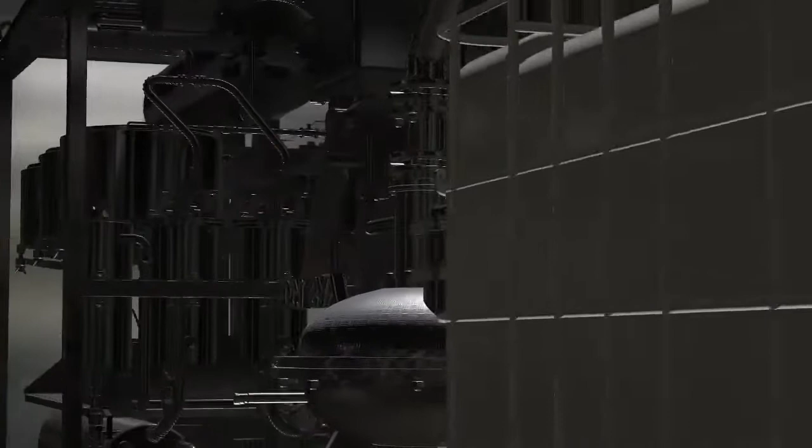In this video, we will show you how to reduce the sulfur content in diesel fuel using purification reagents.

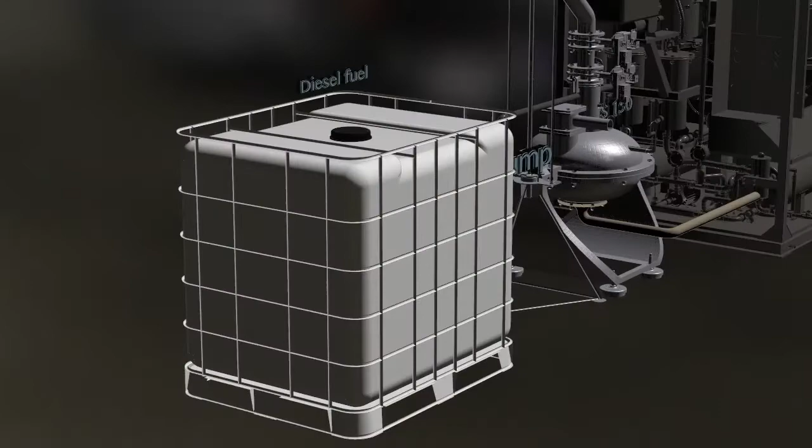Flowchart of cleaning diesel fuel of sulfur consists of a tank with a volume of 1 cubic meter, a pump for pumping fuel from a tank into AVS 150 vortex-layer device with a measuring pump for supplying a reagent, a dispenser supplying the ferromagnetic particles into the working chamber of AVS 150 vortex-layer device, and UVR vacuum regeneration unit.

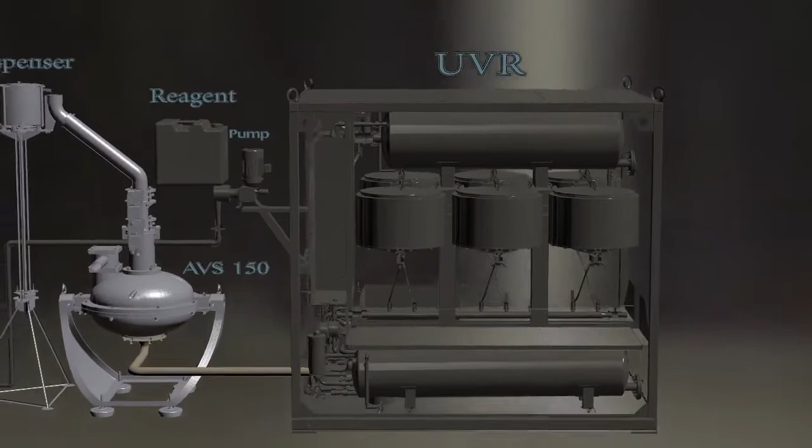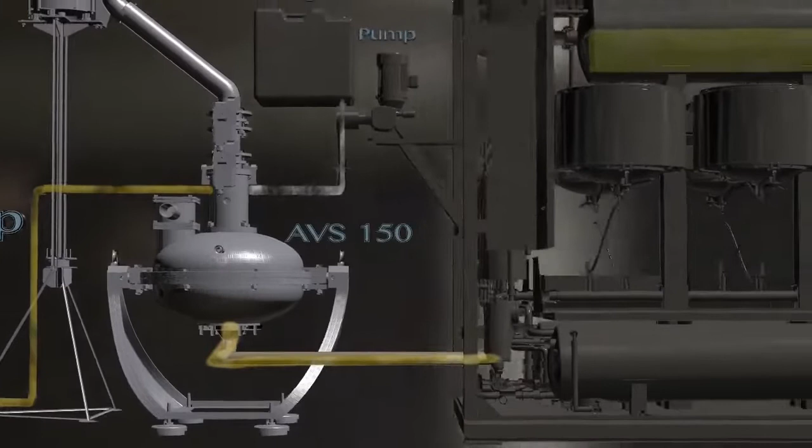We pour diesel fuel into the tank with a volume of 1 cubic meter. It is pumped into the working chamber of AVS 150. The reagent is fed at the same time from a 30-liter barrel. The treatment in AVS 150 lasts fractions of a second.

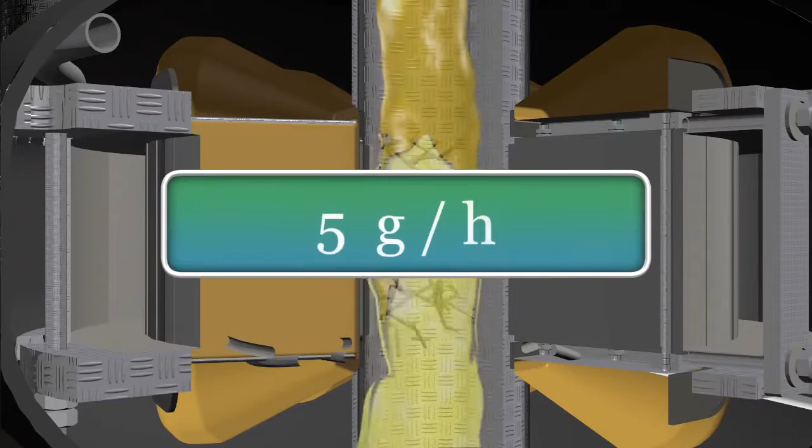Steel ferromagnetic particles help to mix reagent with diesel fuel. The ferromagnetic particles wear off during operation at 5 grams per hour, or 0.01 gram per liter of diesel fuel. Ferromagnetic particles are reloaded automatically by a dispenser. The productivity of the unit is 0.5 cubic meters per hour.

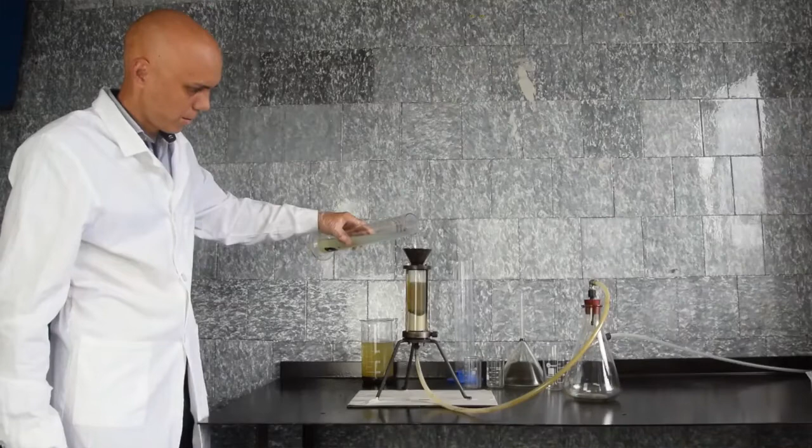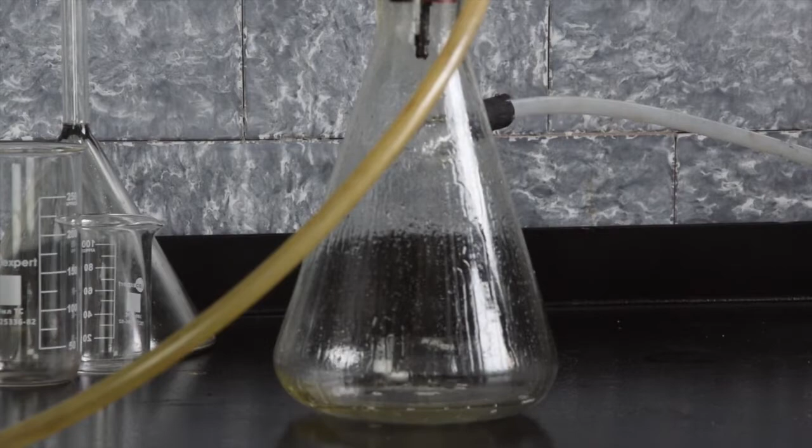The effectiveness of reagent cleaning depends on the intensity of mixing the components into the emulsion. Then the emulsion needs time to separate with precipitation of reagents. We use the vortex-layer device AVS 150 to amplify this process. It provides intensive mixing of diesel fuel with reagent despite low temperatures and low concentration of solutions.

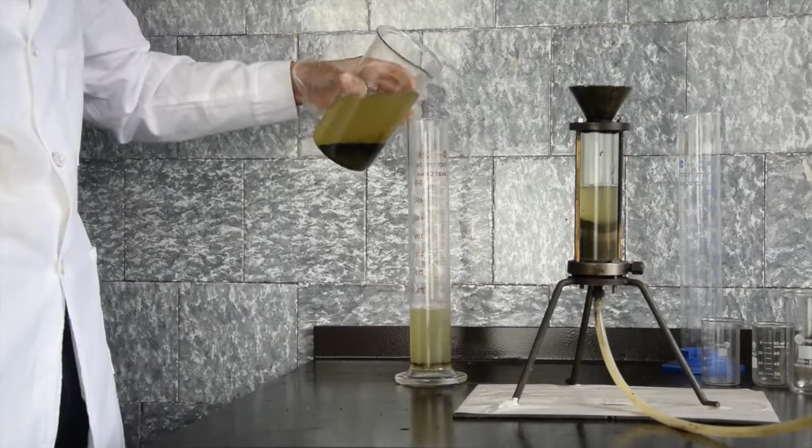First, the fuel is preheated to 95 degrees, so it is not necessary to heat it during the process, as the temperature in the unit's working chamber is 100 to 150 degrees. Then the precipitation and filtration is done in the UVR fuel oil cleaning system.

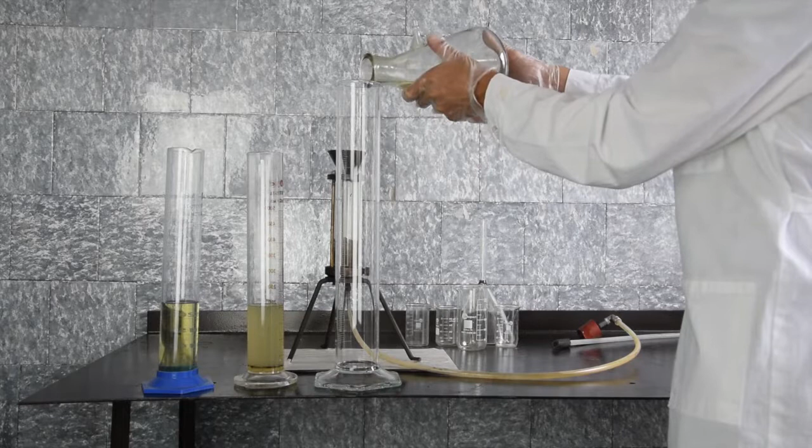Technical characteristics of diesel fuel according to the quality passport: sulfur content 337 mg per kilogram, flash point at 75 degrees. Fuel properties: no more than 25.3% in volume evaporates at 250 degrees, not more than 93.3% in volume evaporates at 350 degrees, and 95% in volume distills at 354.2 degrees.

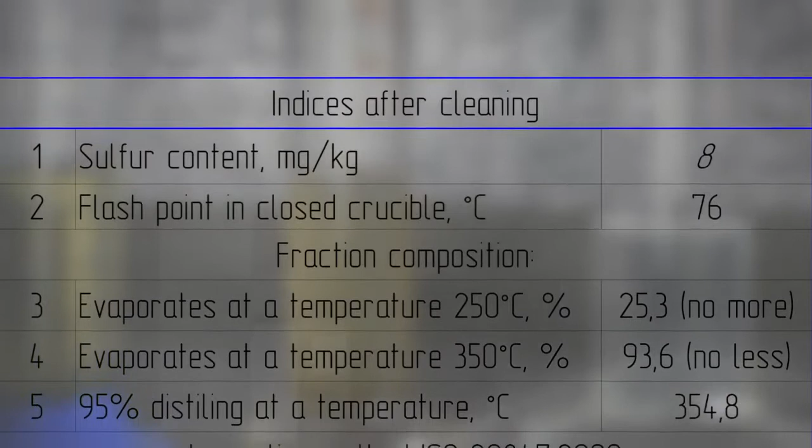Technical characteristics of diesel fuel after cleaning: sulfur content 8 mg per kilogram, flash point at 76 degrees. Fuel properties: not more than 25.3% in volume evaporates at 250 degrees, not less than 93.6% in volume evaporates at 350 degrees, and 95% in volume distills at 354.8 degrees.

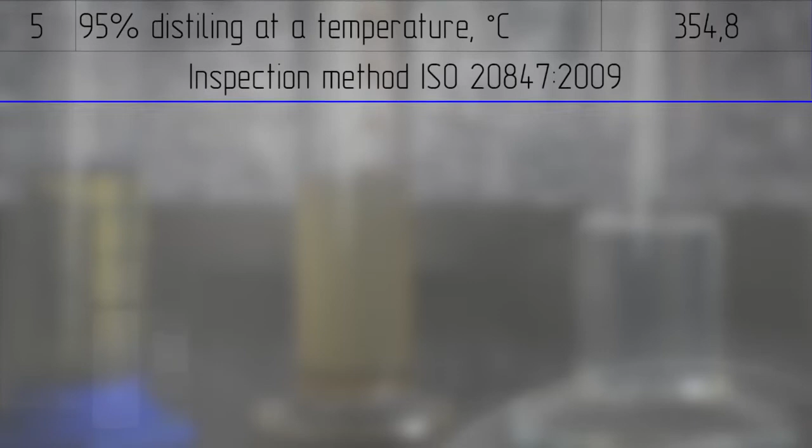Sulfur content may be determined according to the test method of ISO 20847 from 2009. The obtained sample matches European emission fuel standards Euro 5.

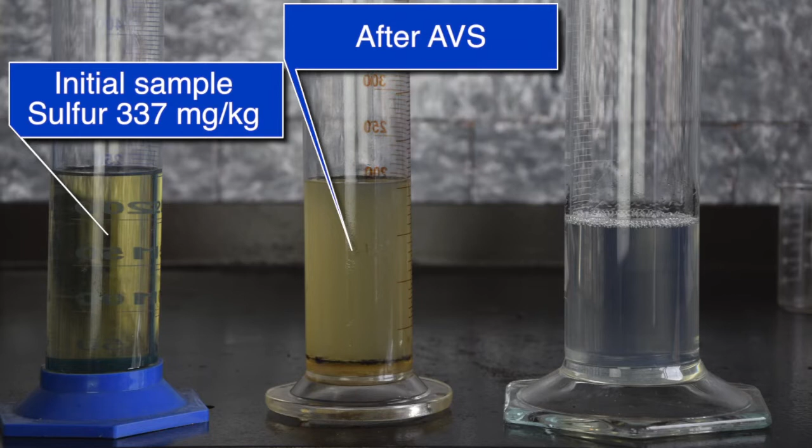We will show you the sample after mixing it with reagent in our AVS 150 vortex-layer device, and then the sample after purification with sorbent in our UVR laboratory filtration unit.